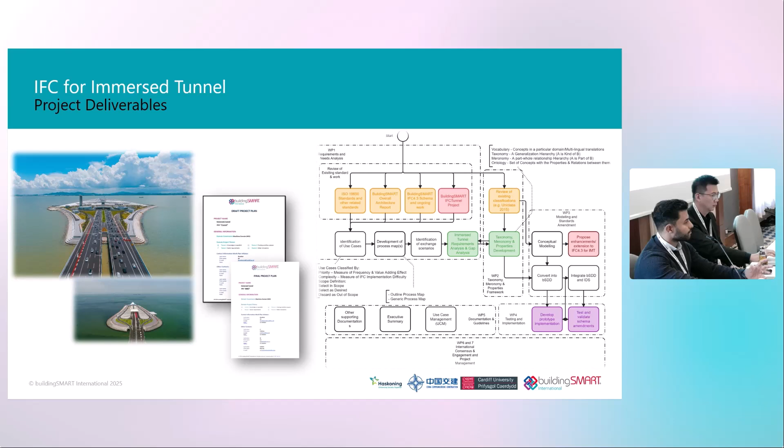And of course, we have the UCM, which is more a library. We can use it later on. So we use the IDM, even if it's an old concept or standard that is not fully shown within the IFC or within the openBIM workflow, but it's quite a proof that it is actually good to be used. So we divide this into 4 primary tasks. So now I'll talk first. We'll zoom into each of these items to actually look into more details.

But the overall is reviewing the existing standards within the buildingSMART ecosystem. Then we move to developing the use cases, the process map, whether it's high reference process map or more use case process maps, and then defining the information or exchange requirements or the exchange scenarios that can be captured through these process maps. All this helps us also to develop the gap analysis.

So we have different ways. So we have the IFC schema as the main base to do the analysis, which is IFC 4.3. But at the same time, we have the tunnel project, which is running, still in progress. So we are looking forward to see the final result when it's officially delivered, so we can actually do another small or light gap analysis against what has been developed.

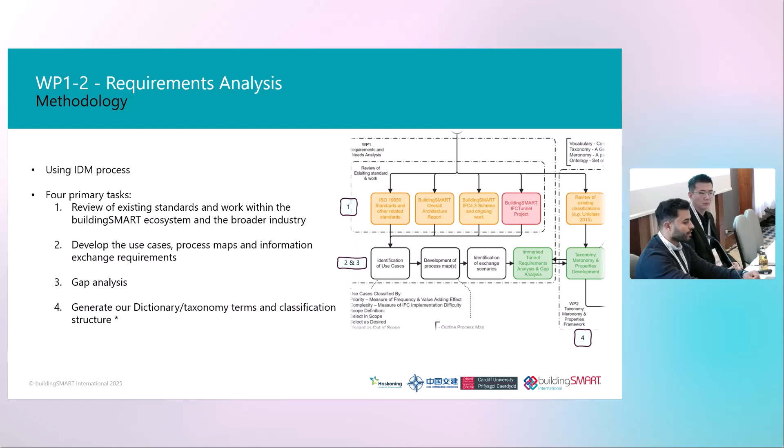And all that helps us to actually define our scope and the range where the immersed tunnel needs to be captured. And after that, we can define our taxonomies, classification structure based on all these concepts that have been defined within the use cases. So that's the first part when we reviewed the existing standards. So as I mentioned, we have the overall architecture report.

So we can look at the functional components, the spatial structure in the IFC schema, and different angles we can look at the IFC schema. But the first thing, you need to actually have a limit where you're looking at, you need to define the certain scope, so you can actually look within the IFC schema. Otherwise, you'll be looking into a schema that has been developed over the years, which is quite complicated and can be represented in different ways as well.

And also the tunnel projects, we looked at through the requirement analysis report, the summit records - they've been quite helpful, and also the sprints they've been doing with the software vendors. Sergi from the tunnel project mentioned they try to show how the IFC file can be structured, going from IFC project to IFC site to spatial structure, even to what they're proposing at IFC 4.4, like the IFC tunnel classes. So they covered a lot of wide area, focusing on the geotechnical part, the systems, and also the IFC alignment.

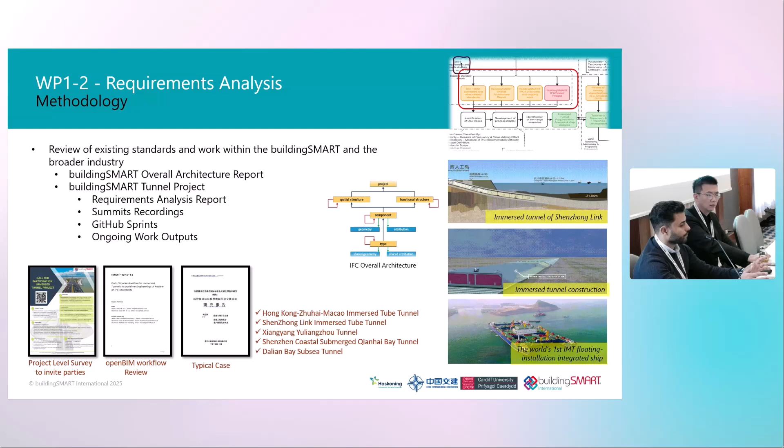Then we move to the use cases. So now we need to define the use cases. We looked at the tunnel project use cases to avoid overlap or repetition, and at the same time defined our use cases that come from our industry partners - what they need to see within the IFC schema. That was put into a desk review within our team to prioritize these things by priority and complexity. Complexity is how complex it is to define within the IFC schema, and priority is whether it's high value to the industry, or medium or low.

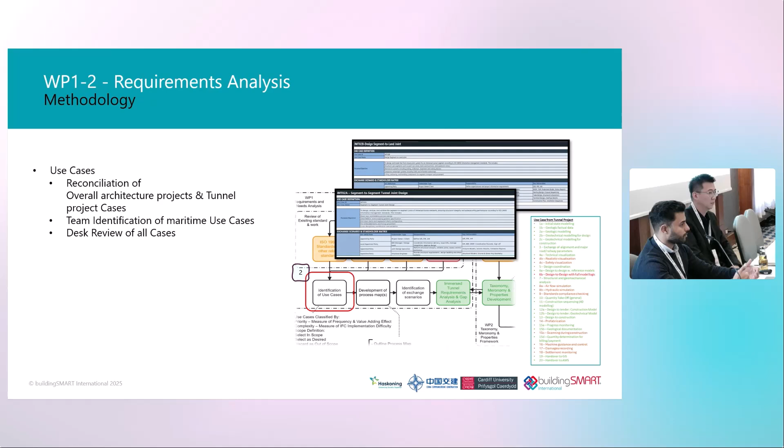Moving on, we had process maps collected from different partners. The challenge is to actually try to find a reference process map, trying to consolidate everything into something where we can understand the immersed tunnel, the exchange points, for example in the design of a tunnel, and where all the data is being exchanged. But we can't just keep it - we need some generic reference process map, because each country or organization may have a different way of doing certain things. So we need to find a more reference point to use.

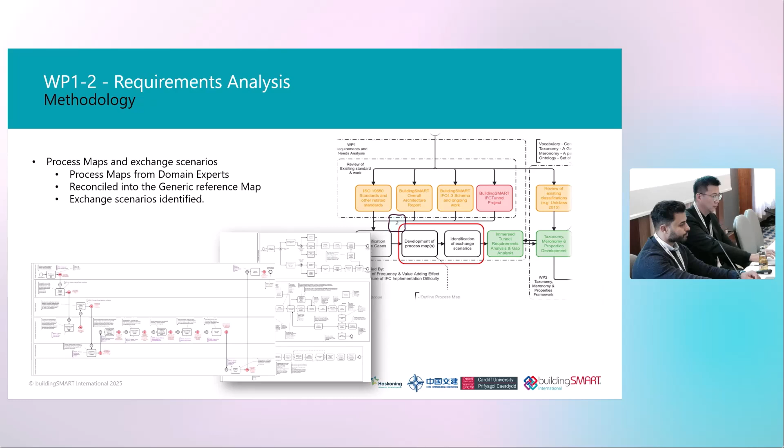Along that path, we also developed the taxonomy, trying to collect all the concepts and structure them. Currently we're collecting everything, documenting it in Excel sheets, and mapping it through the IFC schema, looking at the schema and trying to find what best fits certain concepts.

We're trying to go further than that by documenting this in a more automated way, where we can capture these concepts, taxonomy, meronomy or properties, while also bringing all the industry partners together during development to actually build that taxonomy or agree on a certain taxonomy.

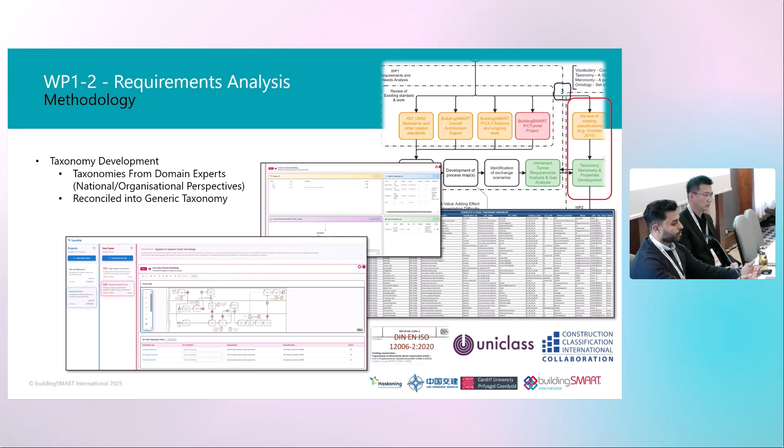So now moving to the use cases - within the tunnel projects we had around 31 use cases, divided into main use cases and subdivided into sub use cases. Within the immersed tunnel, we're trying not to overlap or repeat what they've been doing, because we still don't have the official documentation for the tunnel projects yet.

If we just focus on the IFC 4.3 schema without taking the tunnel project into reference, that can at some point overlap with them once the official IFC schema with the tunnel update is released. So to avoid this, we're focusing on specific use cases for the immersed tunnel project, but taking the tunnel project as a reference point so we can learn as well.

So we defined this into 9 sub use cases. Some use cases in scope, for example, the segment-to-land joint, which they call special segments - some segments connect between land and sea, versus typical segments connected within the sea. We're also looking at outfitting, because they have temporary outfittings and other types of structures that have been used, and we're trying to capture this too.

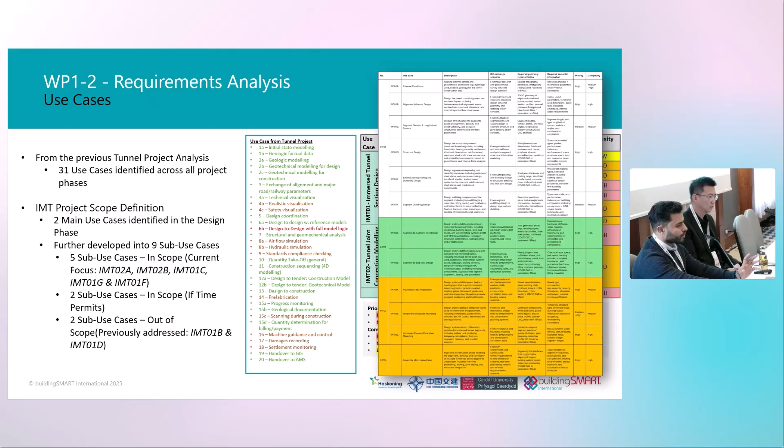There's more detailed documentation of the use cases. Moving to the process map, we now have a high level process map showing the design stage of the immersed tunnel. Within that, certain use cases have been evaluated in more detail, breaking down into more detailed process maps.

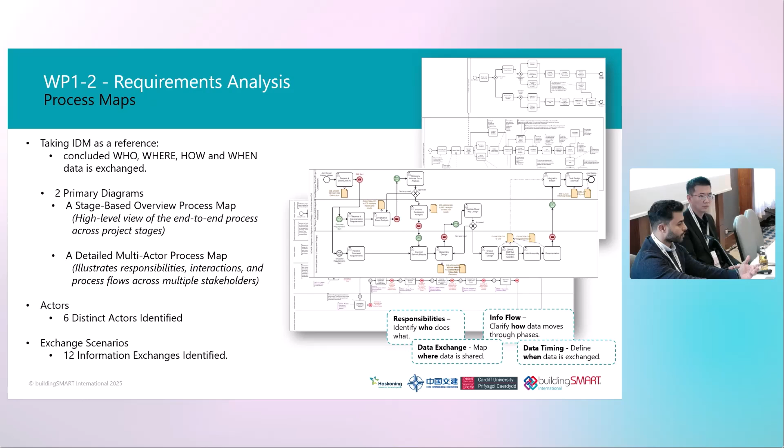Alongside this work, which is what's coming from our industry partners, we're trying to align it with ISO 19650 and the level of information need concept. There's a big connection here between these logics, so we need to figure out how IFC is complementing ISO 19650, or whether ISO 19650 is complementing the IFC schema. We need to see where the exchange points are, or the touch line where all this data can be exchanged.

When we say level of information, LOIN, or level of information need, that's what we talk about with IDS, which is part of the openBIM workflow. We're trying to capture these requirements through IDS files. This was mentioned in the keynote speech on the first day, where the IDS files, I think from the airport domain, define several IDS files, and all these IDS files actually represent the final project delivery.

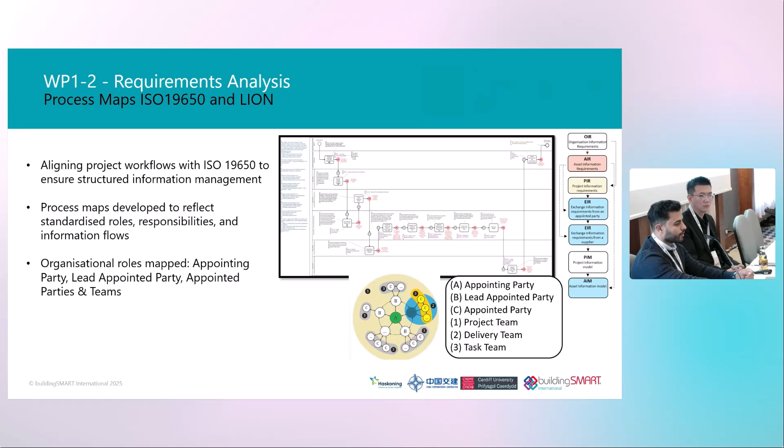So it has different levels of information in each of these IDS files. For the taxonomy development, once we collected these concepts, we still need an expert panel to actually standardize this so everyone agrees on the final version. But in order to do that, we need to use some kind of standardized way to capture this information.

So we use ISO 12006-2:2020, which provides the classification logic. It's not providing us with the classification itself, but it gives us the logic to break down these concepts into different categories, and also gives us the taxonomy, which is the type of relation, the meronomy part of relation, and also the properties, which takes us to another concept, the ontology, where we define the object, predicate, properties - these triples.

One thing about the 12006 standard - in the past it was more specific, but with the new release in 2020, because a lot of classification systems have been released, they're trying to make it a bit more generic. That's something I think has been included within Port Waterway part one, but with the new part, it was a good idea to do a refresh and go through the newly developed version to have a look.

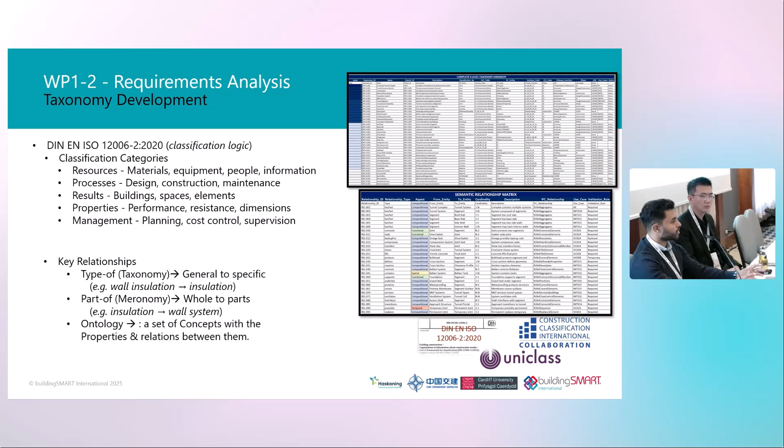This video shows the platform we're trying to develop to capture this taxonomy. It's ongoing, under development, so it's not something fully developed yet. Let me explain first.

So you have the project, the use case you define within that project, and then you can capture it using the BPMN process map to develop it. Within that exchange, you can also inject some of the ISO 19650 concepts. Within that, you can then go to the domain or model concepts, where you're talking about classes, object properties, or data properties - maybe some of you have already seen Protégé, for example, so it's something a bit closer to that.

But Protégé is based on RDF data structure, whereas here we are using more of a structured database, which is something we have another idea to add in the future.

Some of you might question why this is different. You complete a certain use case and make sure it's correct, then you can push it there, and the industry can actually learn from it for future projects.

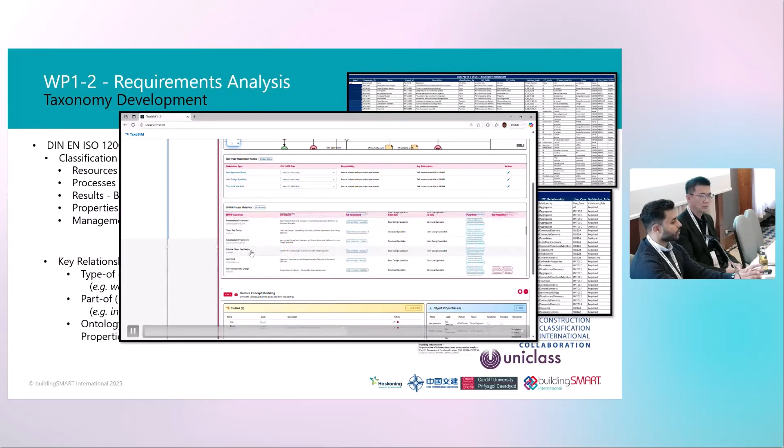On top of that, we're thinking to add AI into it. So that's another layer where we're trying to use natural language processing, or large language models, maybe a customized one, where we're focusing more on the IFC schema and the classifications. And that can help us give suggestions or recommendations when you define a concept.

So if you say, I want to define a joint, or maybe a Gina water stop, what is the closest thing in the classification to this? That gives you more recommendation, help you. It's more like having a third voice in the room to give you information while you're developing your taxonomy.

And that can also later be structured into IDS files, valid IDS files. But this is something still in progress.

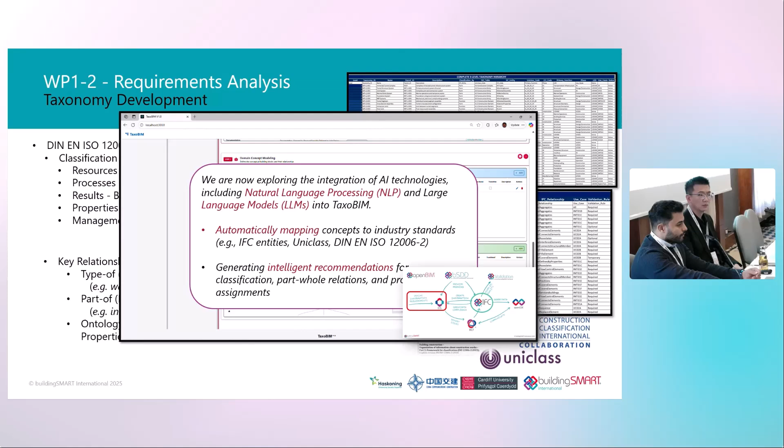For the gap analysis, as we mentioned at the beginning, we have different work packages, but these work packages are not working separately. They are actually either overlapped or linked somehow, so they contribute to the next one, and we are doing it as cycles. We go through the work package in a first cycle, then we do a second cycle to improve it.

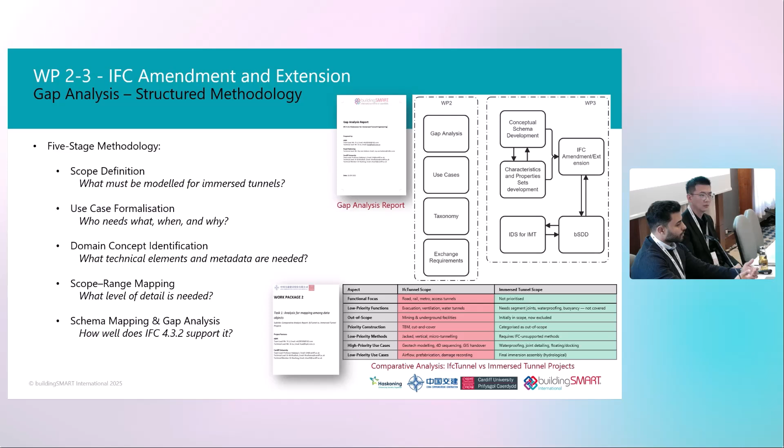So we divided the gap analysis into a 5 stages methodology, focusing on the scope, the use case formalization, the domain concepts, technical elements and metadata. That helps us define the scope and range, and also map it to the IFC schema.

Another aspect we looked into is how to identify entities in the IFC, how to break down a project. So we have the spatial structure and the functional structure, and that also helps us define 3 waves when we review the IFC schema.

So one focuses on the metadata infrastructure, which is the high level, maybe IFC project, IFC organization, and that kind of concepts. Then moving to the components, and also whether the geometry is enough, and also the spatial structure, how the tunnel is actually structured. Because for a building it's quite clear how the spatial structure can be, but for tunnels or other infrastructure projects, it might be a bit confusing on what is the right approach to follow.

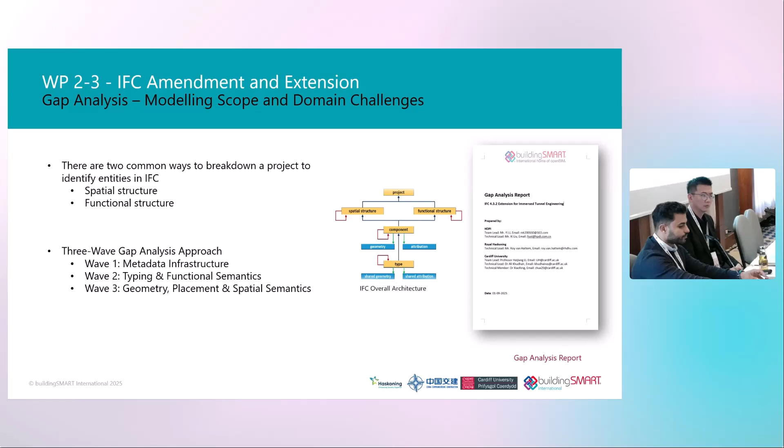If we look at the spatial structure, we have the project, we have the site, then we have the facility level, then we have the facility part level. That's the first assumption. Then we have the tunnel section. A section might be made up of 3 to 5 segments, and that will make a full section, and the segment is the modular section of the tunnel. Between these sections we have the joint mechanism, where we have like a Gina water stop, Omega water stop, and other types of components.

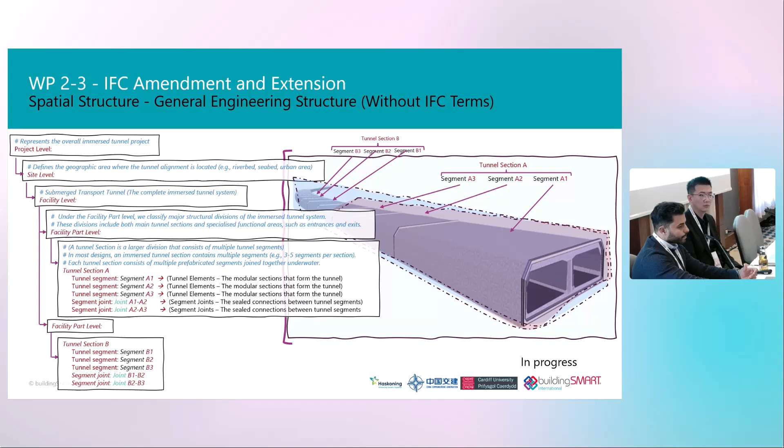Another thing we did is to run an example of exporting a segment from IFC from Revit using the IFC 4.3 exporter with the current version. So we downloaded Revit 2025 and tried to use the default Revit exporter. We looked on GitHub for the latest update that has been released, maybe to fix some bugs or something with the exporter.

So we exported using the closest match to marine facilities, or to Immersed Tunnel. We set it to IfcMarineFacility, and also tried setting the predefined type to user defined, so that's something we tried to do without any manual mapping within Revit.

So there's an option to actually go classify what type of entity they are close to. So trying to actually use exactly what the model has been received by or sent to us. And we saw a lot of IfcBuildingElementProxy defined within this model. So there's no semantic clarity yet. So we're missing that. So everyone needs to actually define predefined types to actually provide more clarity.

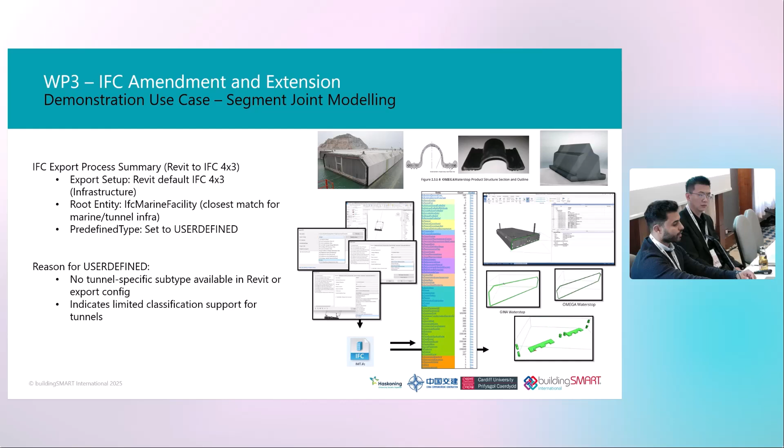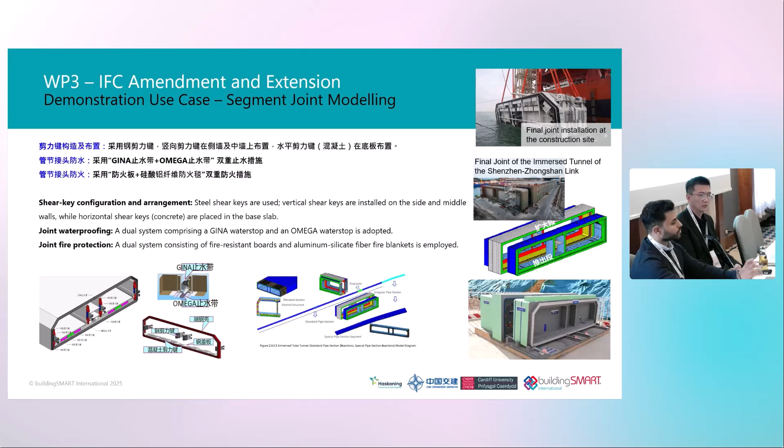And also this is one of the use cases we selected, which is the joint design, because we found this use case is a bit different than other use cases within the tunnel. The joint might be used in other infrastructure, but in this case it's a bit more specific for the immersed tunnel. And we define the concepts, the properties within that joint. And this is without the IFC.

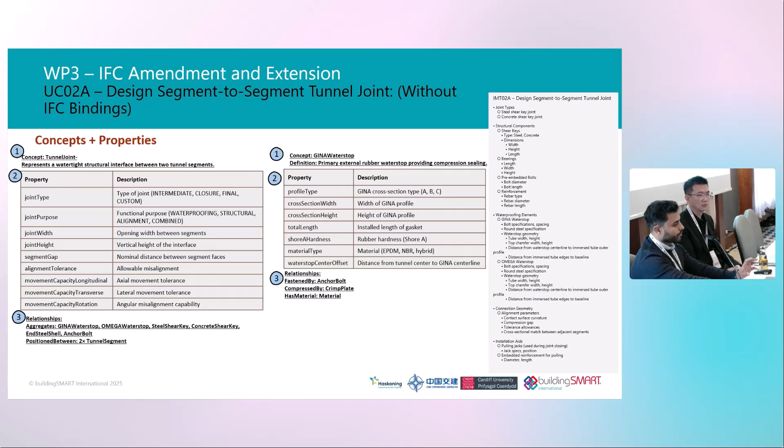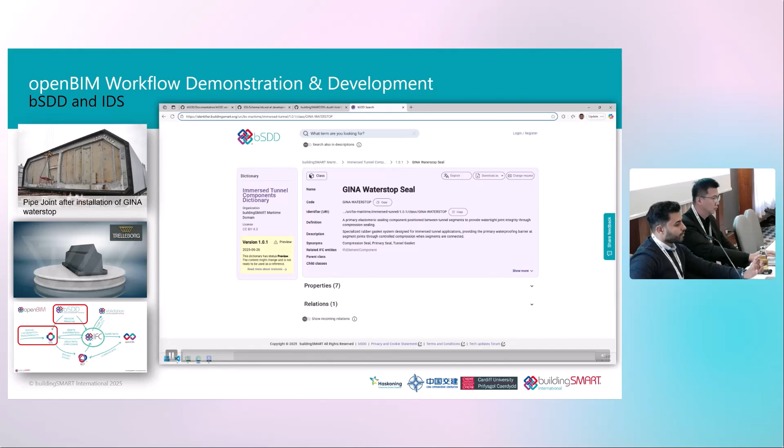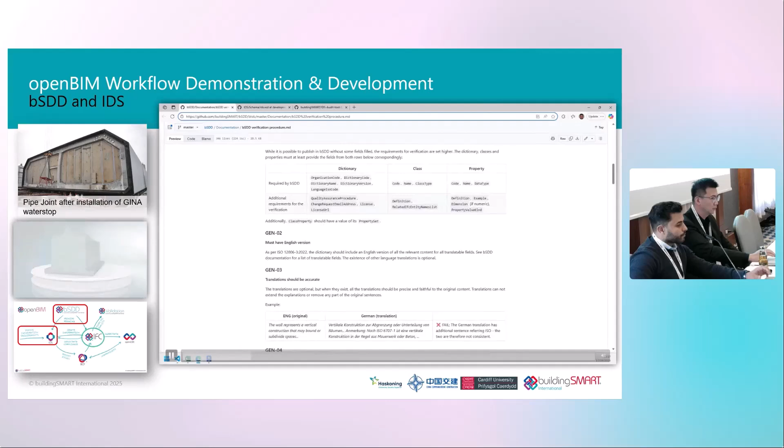Then after that, we're trying to show it through a demo through bSDD. This is more like a demo where we push to the bSDD as a test. So that's Revit, that's the segment, and this is the JSON structure of the bSDD. So we document all the concepts and their properties, and then we followed the guideline for developers from buildingSMART to make sure the JSON file we produce is a valid JSON file that can be pushed within the bSDD. So for example, you can have the IFC prefix within the bSDD.

Then after that, we developed a plugin using Python. It's still under test, so we're trying to add a classification while connecting to the bSDD dictionaries using the buildingSMART API. And then we can select the things we already published in the bSDD to add these properties. So once we add this, you can see here in the side panel, the URI has been added, or the classification, and also the mockup properties have been added here just to test.

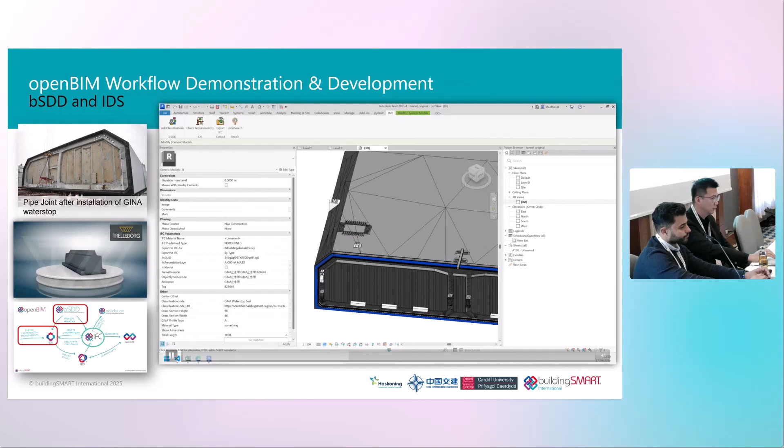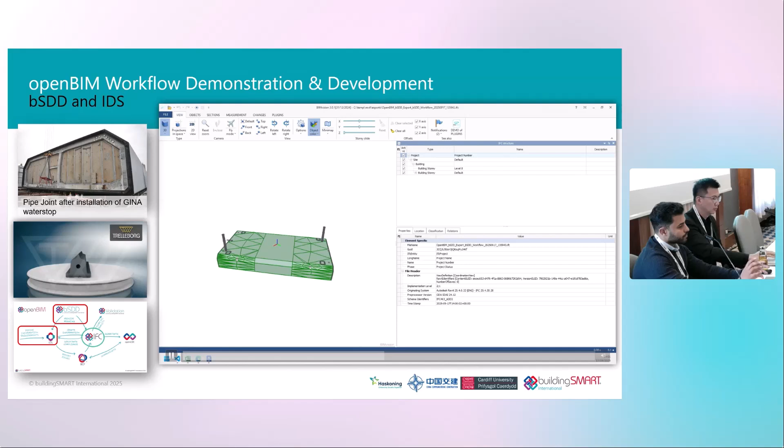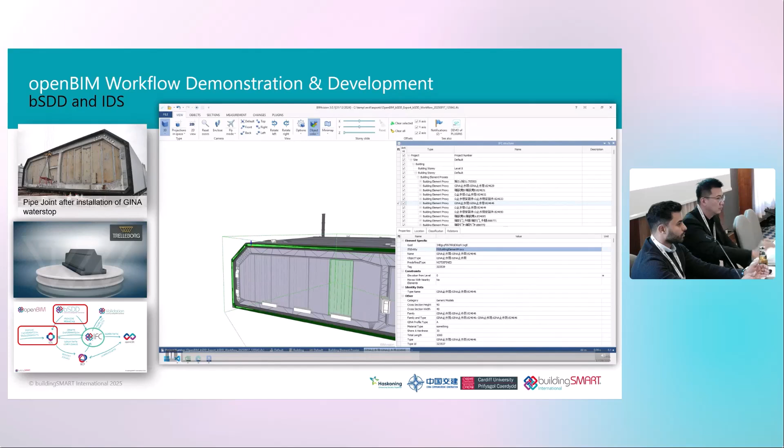And after that, we try to export the model in IFC. So here we're using the default exporter within Revit, but on top of that, we're building the IFC reference mechanism. So IfcClassification, IfcClassificationReference, and you see the properties, but it's still not clear. It's still under development, but the idea is that we don't have the property sets yet in the IFC schema. These are more like customized properties. Also with Revit, something has been added under the other categories where we can add more clarity by adding it into maybe IFC parameters in the future.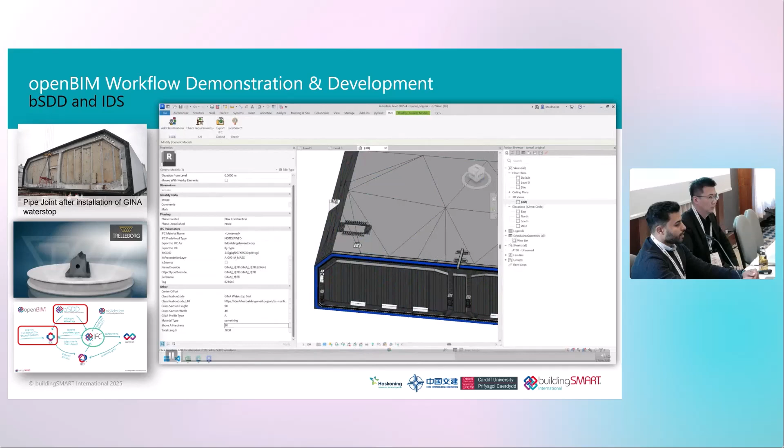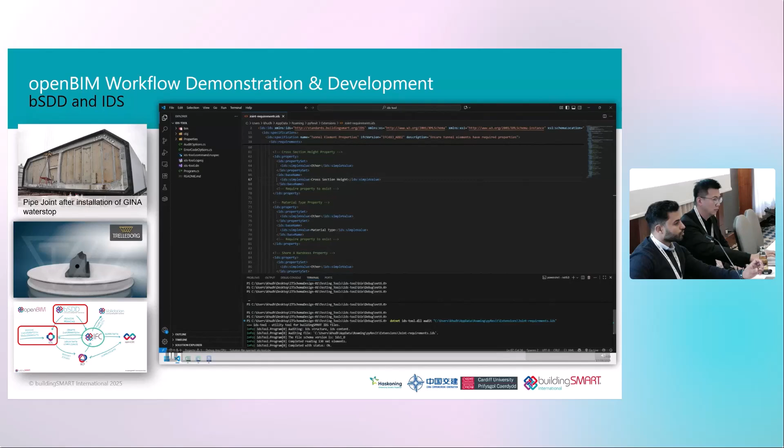The next part is to actually test the IDS. So with these requirements we added, we generated an IDS file, and that IDS file is documented using the IDS schema published in GitHub by buildingSMART. The structure you see is divided into specifications and requirements, and then we use the IDS audit tool. The IDS audit tool, also by the buildingSMART community, helps us check whether the IDS file we created is a valid IDS file.

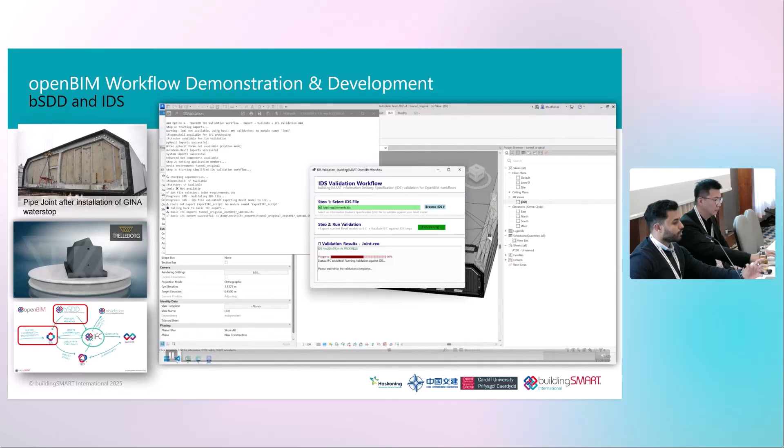So once we created that, we can do the check, and here we're using IfcOpenShell, or IfcTester, to check the requirements against the information of the properties we just added. So we see here two specifications have been added. One passed, which is the IfcBuildingElementProxy, because most of the model was classified under IfcBuildingElementProxy. And the properties have been added only to one element at the moment. Only one has the properties. And all this workflow is contributing to the IDS bSDD workflow.

There are other options. For example, we could have used the buildingSMART plugin, I think, to add bSDD classifications. But when we tried to use that one, it's working with Revit 2024. I think that's the last support for that. So we have two options: either downgrade to 2024 and try it, see how it works. Which we have done, but that's for one purpose.

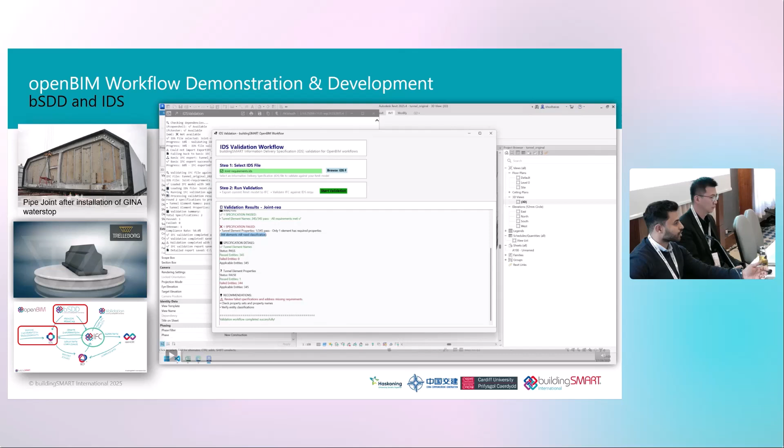And the other thing is to just continue our work with the latest Revit version, what we can add to that, and at the same time we can learn how the bSDD actually works. So how we connect to these APIs, how we're going to get the data, how the data is structured. So it's more like a practice for us to actually understand the entire logic rather than using something.

The other option is just to upgrade the APIs and that plugin from 2024 to 2025 and use it as well. So it's both sides. You need some development. So which side do you want to take? Everything works. At the end, we are serving one idea, which is we're trying to show the openBIM workflow, and it is open, so it should be reaching the wider community as well.

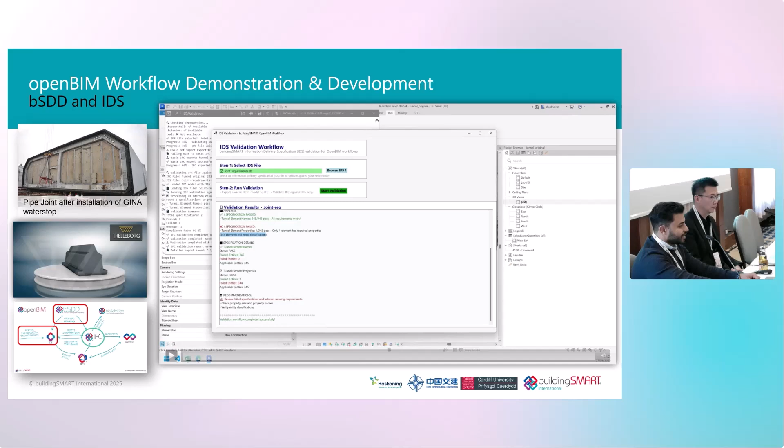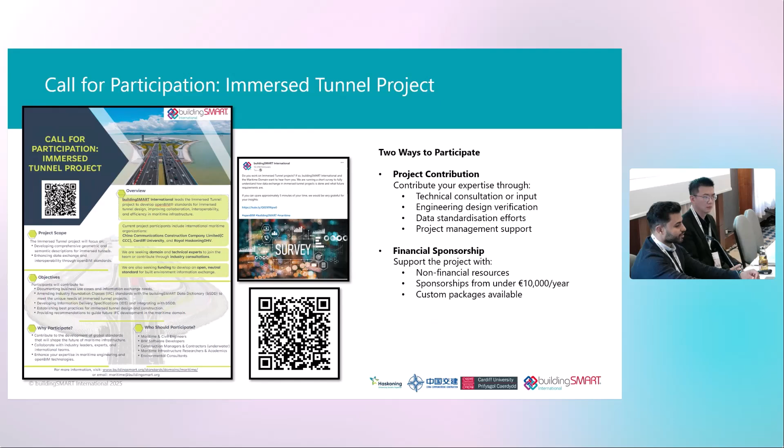And that's the call for participation for Immersed Tunnel. So we're always happy to have more people to join us. We have different types of contributions if you want to join: in-kind contributions, contributing use cases, or any type you find yourself or your company can be part of this project. Yeah, I think that's pretty much all from my side today, and maybe open for discussion if any questions.

Hi, Tina from the airport domain. Hello. I think we got the same problem with the classifications and defining the properties. So the question is, the platform you develop, could it be open for the other domains as well? So we can join together, because I think we have an overlap between airports and tunnel and maritime. So maybe we should work together a little bit more to define these classifications. Would be great.

Yes, definitely. I'm a big fan of the airport domain. They've been working on the openBIM workflow, like Christopher, I think, he's done a lot of work when it comes to all these demos trying to prove how we can actually reach the ultimate output out of the IFC schema. So it's quite good to see you here today.

And yes, this platform is under development, so it's not actually stable to be used yet. But once it's used, it will be open, because that's what everyone is trying to actually collaborate within. So this project is under the Maritime Domain. But of course, we mentioned yesterday in the Maritime Domain session, cross collaboration with other domains is missing, because everyone is developing things in a certain way, and it works, and we need to learn from each other. So we need to give and take.

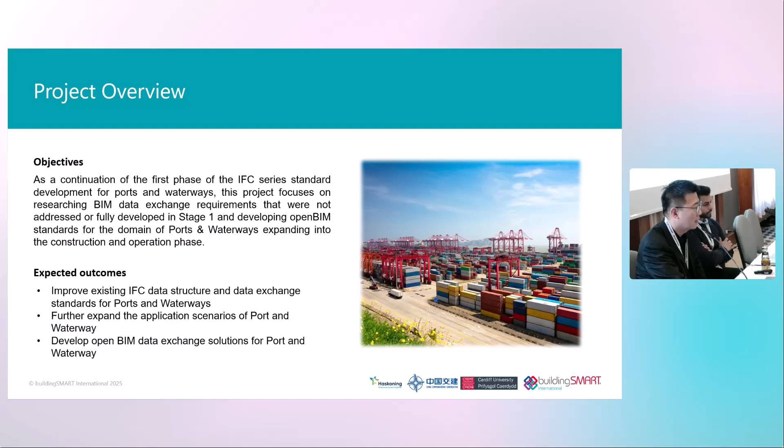And the last part is that we will define some new use cases, not only in the construction and operation stage, but also some newly emerged use cases like AI or more advanced use cases.

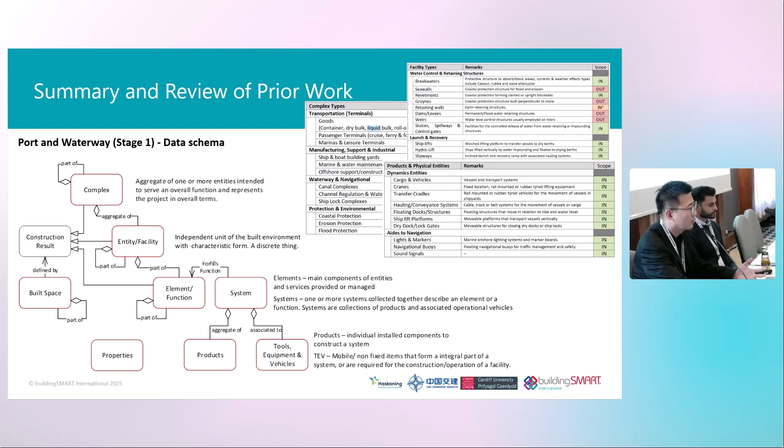The second contribution is the use cases. We grab some information from overall architecture and also from IFC Bridge projects. So we define 29 use cases in the first stage. And we classify these use cases based on the priority and the complexity. Based on these two indicators, we select the most urgent use cases that need to be resolved at that time. So in stage 1, we finally investigate 20 use cases, which are green and orange. And we left 9 use cases for stage 2.

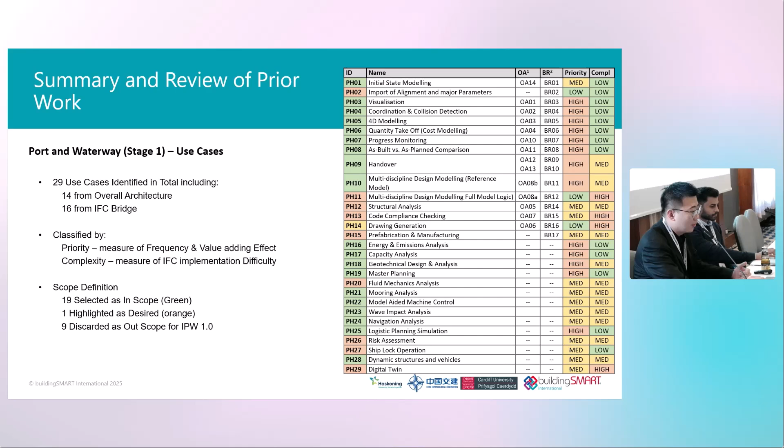So this is the brief summary of all the concepts, types and entities we define in Port and Waterway in stage 1, and all these concepts had been published in IFC 4.3 last year. From this summary, we can see that approximately only 62 main concepts were defined in stage 1. So it's still a long way to practical use for industry partners.

So based on this, we have several rounds of discussion with our industry partners, and we summarize the following 3 main gaps in Port and Waterway. The first one is the incompleteness of the existing IFC schema. The second one is there are still some outstanding use cases in stage 1. We need to finish that. And the third one is there are some new application scenarios emerging in this domain.

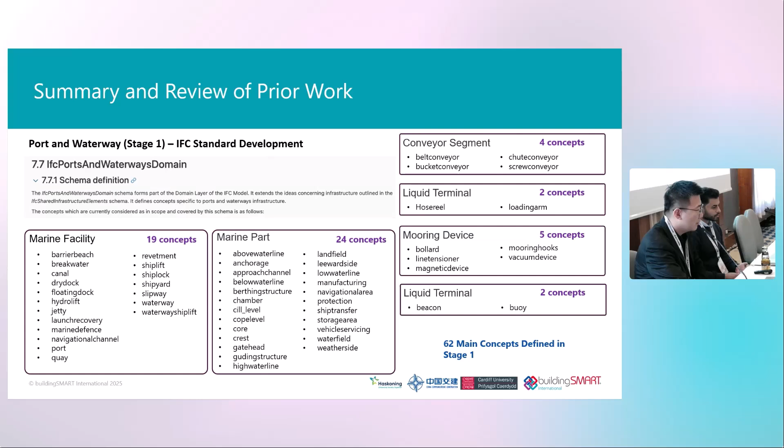So first point, incompleteness. Here's the summary we have for this incompleteness. All the concepts listed in these tables are not fully covered in the existing IFC schema. If we go back to the slides here, we can see for marine facilities, we already got 19 concepts. For the facility types, some of the concepts are covered, like breakwaters, like dry dock. They are already defined in stage 1. But some other concepts like sea walls are not defined in stage 1. So for stage 2, we need to work on these missing elements.

And also for complex types, none of these concepts was officially published in stage 1. That's another part of our main work for stage 2. Besides the concepts, we also have some outstanding use cases. As I mentioned before, there are 9 use cases we defined, but we didn't investigate in stage 1. So here is the list.

And there are some quite interesting use cases, such as structural analysis. At that time, this part was quite difficult and quite complicated. And 2 or 3 years after that, there's a new domain called the structural analysis domain. They published this part of work. So that means it's quite important. And for now, we need to go back to see what has been published, and we need to do some mapping between our demand and the existing IFC schema for structural analysis to see whether we can supplement any new content to this part.

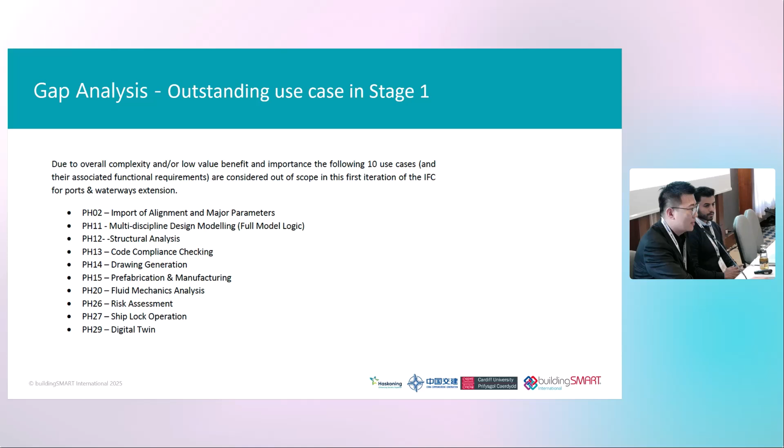So for new application scenarios, we had discussions with our industry partners and got some insight from their side, and we summarize 5 big topics. The first one is protection and environmental. It includes coastal protection, erosion protection, and flood protection. These are all topics we haven't touched in stage 1.

And in stage 2, we no longer just focus on a single channel or waterway. We want to dig more information from the correlation between different channels. So we set up this maritime network and system topic, which is about waterway networks, canal networks, and flood protection networks.

The other quite big part is about the power. So with the push of the government, there are so many green power projects that many industry partners are working on. So maritime power generation is another big topic. We will focus on offshore wind generation and wave generation. So this is a totally new area for stage 2.

And as I have said before, for stage 2, the main contribution will also focus on the operation stage. So asset management and operation and maintenance will be another big part. We will focus on inspections, including underwater, maintenance of as-built asset models, and also operational planning and logistics. Besides this, there are some basic elements we need to supplement, like the geology and the environmental part, erosion and transportation, flooding and water management, something like that.

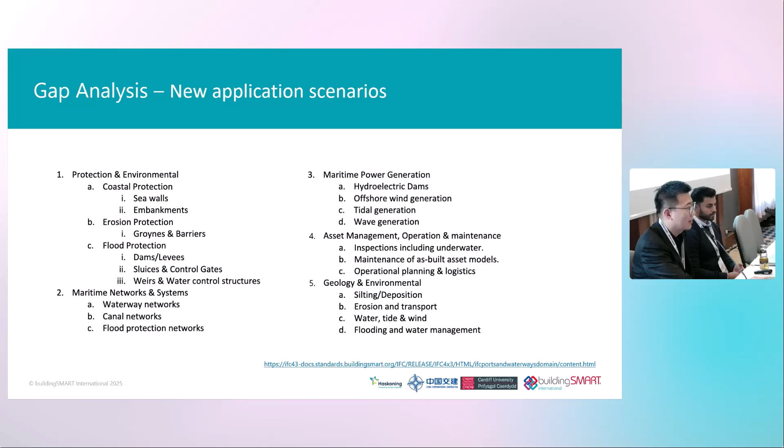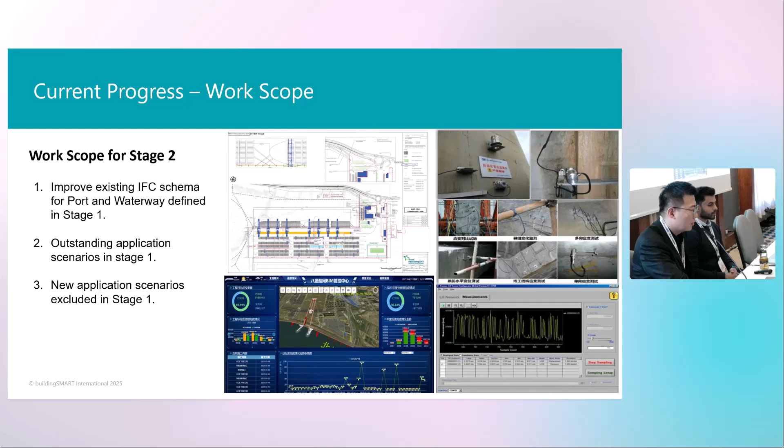So just a summary of the work or the contribution we want to achieve in stage 2. The first one is we want to improve the existing schema for port and waterway, and also we will finish some of the outstanding application scenarios we defined in stage 1, and we will add more new application scenarios for stage 2.

So here's the work plan for the second stage of port and waterway. The international consensus and engagement, and also the project management, will happen throughout the life cycle of the project. And for the technical development part, we will start with requirement analysis. We define new scope requirements. And after that, based on these requirements, we define taxonomies and also corresponding properties. After we got all this system ready, we will move on to conceptual modeling and schema development. This will help us to develop some technical components like IDS and the bSDD.

After all this work has been done, we will move on to documentation and do some modeling guidelines to help industry people, to tell them how to use this developed IFC schema. And the last stage is about the testing and the deployment.

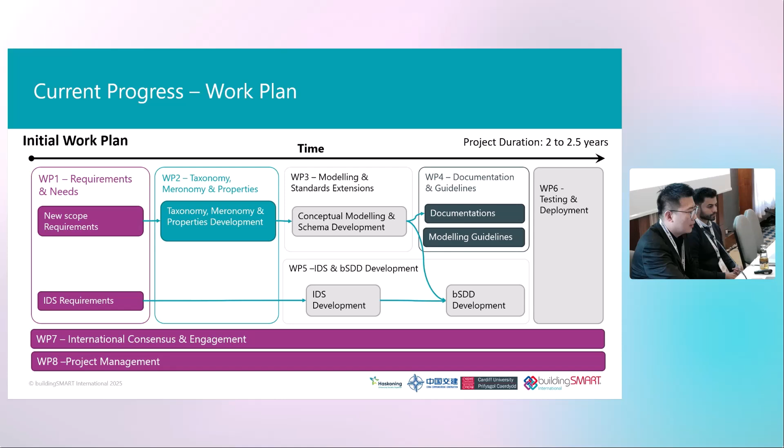So here are our preliminary thoughts for refining the existing schema. As we had some discussion with our industry partners, they mentioned that they feel it quite difficult to use the existing IFC schema during their practical work. They have their own classification system, but they can't find some of their entities in the existing IFC schema. So they feel it's quite difficult to map between their classification and IFC.

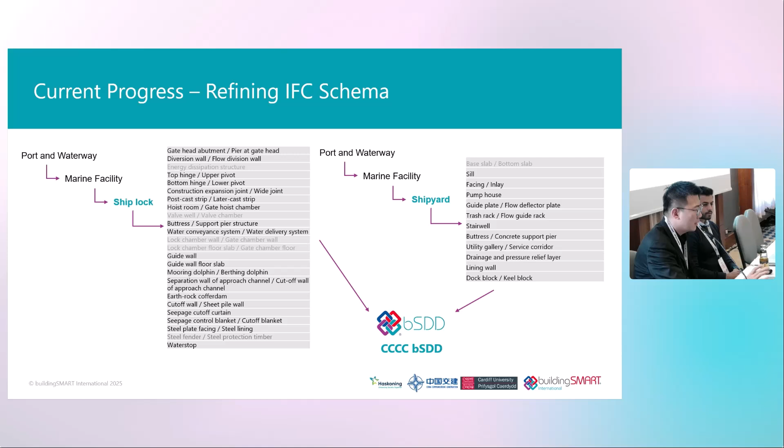And I know for some of the concepts there are some alternatives in the IFC schema, and they also have their own classifications. So all this can go to bSDD. If we make all this happen, I think it's quite helpful for us to have more practical partners work with us.

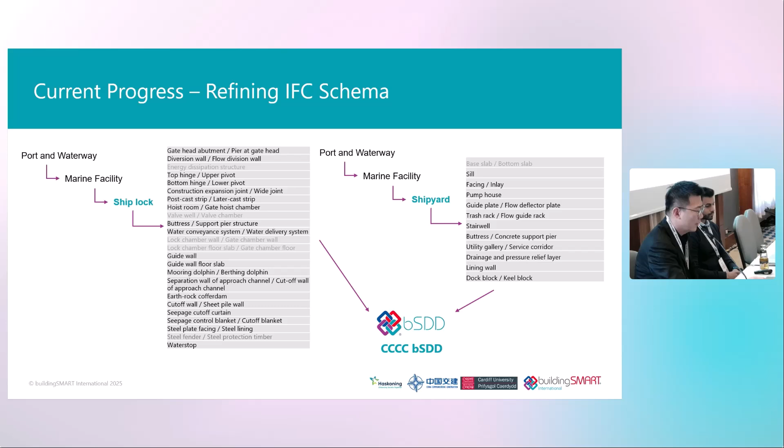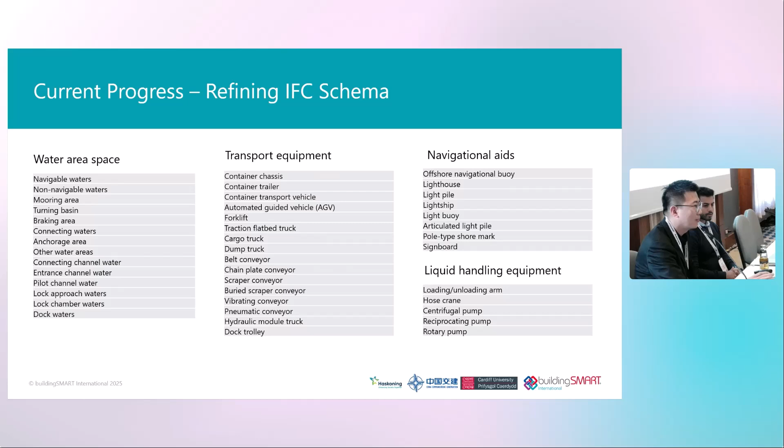They also provide some other concepts in water area space, transportation equipment, navigational aids, liquid handling equipment. So after this summit, that's the next stage of the work. We will go through all these concepts to find whether we can add more potential concepts into the existing IFC schema.

For the use cases, we investigate two use cases. The first one is water quality monitoring. In Port Waterway engineering, water quality monitoring is quite important because it is essential for ensuring safe navigation, protecting marine ecosystems, and maintaining the long-term sustainability of coastal infrastructure.

In China, water quality monitoring is becoming more and more important. It's gradually becoming a mandatory requirement for governments, saying if you want to have any projects in the water area, you must do this water quality monitoring.

So here's the process map. Normally, for this type of water quality monitoring project, there should be five stages. The first one is preliminary preparation. You need to do site survey, have an installation plan, and also do some procurement.

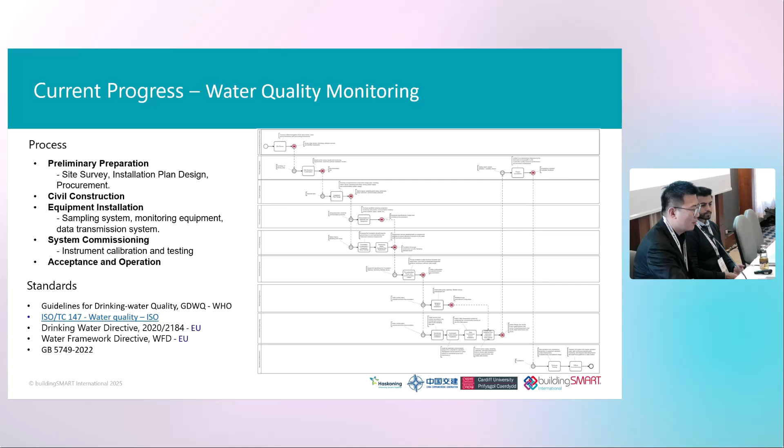Until now, there are many official standards for water quality monitoring released all over the world, from WHO, from ISO standards for water quality monitoring, and some regional water quality standards like EU standards and Chinese standards. We went through all these standards and summarized content from them.

For the information exchange process within water quality monitoring, there are mainly two big parts. The first one is the sampling plan. During this stage, you need to grab information from site survey, and select the sampling cross sections, sampling points, and decide the sampling depth and frequency. That's one big part for information exchange.

The other part is the monitoring parameters. Normally there are two types of parameters. One is water quality parameters, including physical, chemical, microbiological, and radiological parameters. And hydrological parameters, like water depth, flow velocity, and flow direction. So mainly these two types of parameters need to be monitored.

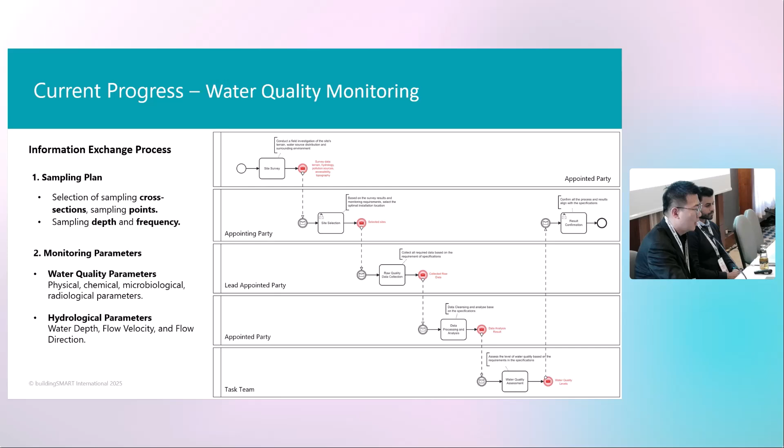Here's a table summarizing all the categories, indicators, and typical limits for each indicator as defined in different standards.

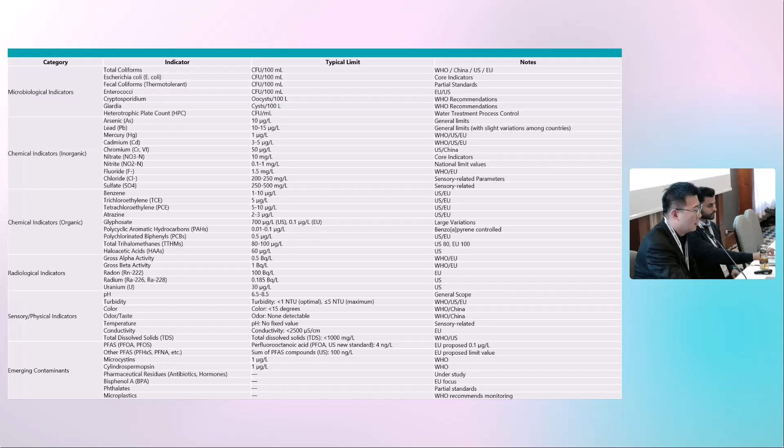Based on this information, we summarize a potential schema for water quality monitoring. Within the existing IFC schema, we have Port Waterway, and under that we have Marine Part. Within Marine Part, we have Water Field. That's all for the existing schema.

Then we want to add another concept called water quality indicators, with six sub-concepts for this category. That's all the categories for this monitoring. Within each category, there will be different indicators, and all these indicators will go to the property set.

That's the first use case. We haven't finished yet, but we will gradually refine it after this summit.

The second one we started is coastal protection. Coastal protection also plays a critical role in safeguarding shorelines and infrastructure from wave action, erosion, and storm surges.

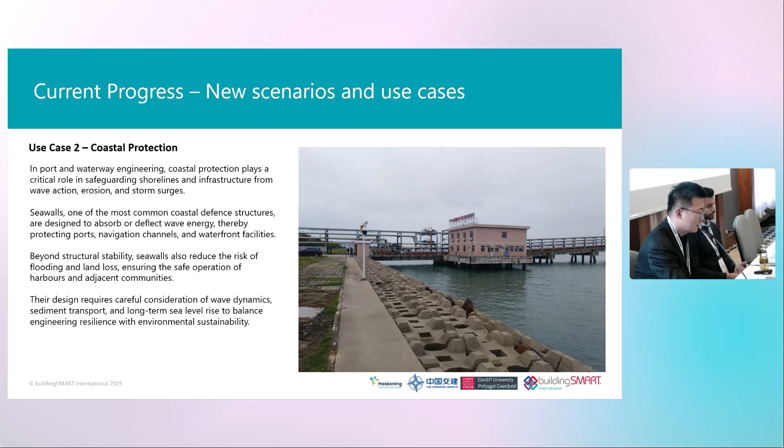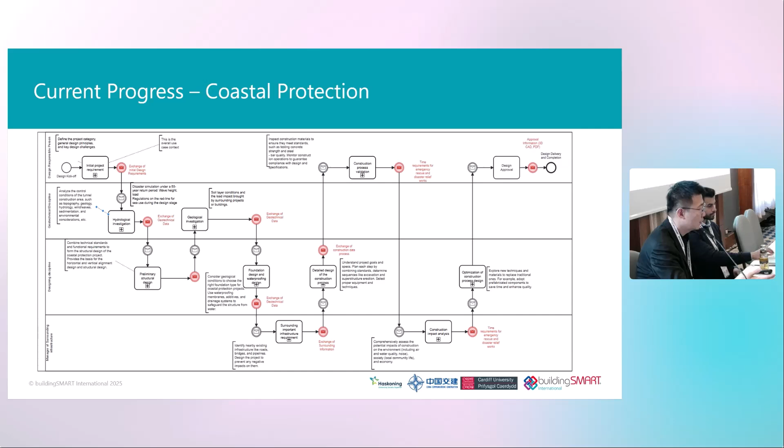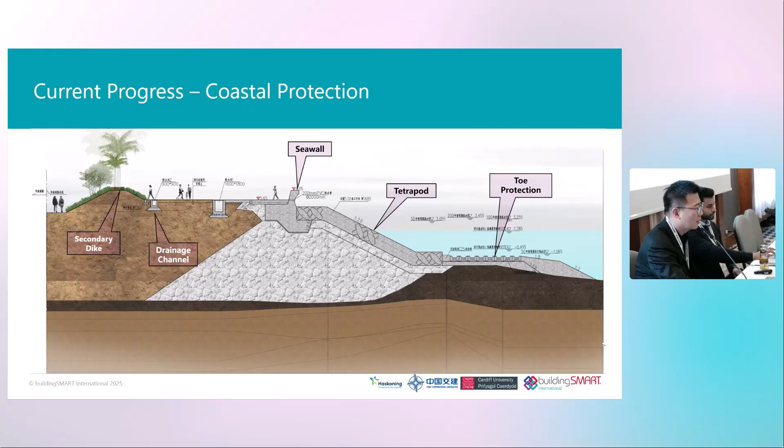For coastal protection, we haven't touched anything in stage one yet, so we summarize all the concepts based on their functions. As I mentioned, there are several ways to build this taxonomy: one is from the spatial side, the other from the function side.

Based on function, we summarize several big concepts, and then add all the facilities within different categories. For example, for wave protection and energy dissipation structures, sea walls and breakwaters all belong to this category. So we set seawall as a subconcept of wave protection and energy dissipation structure.

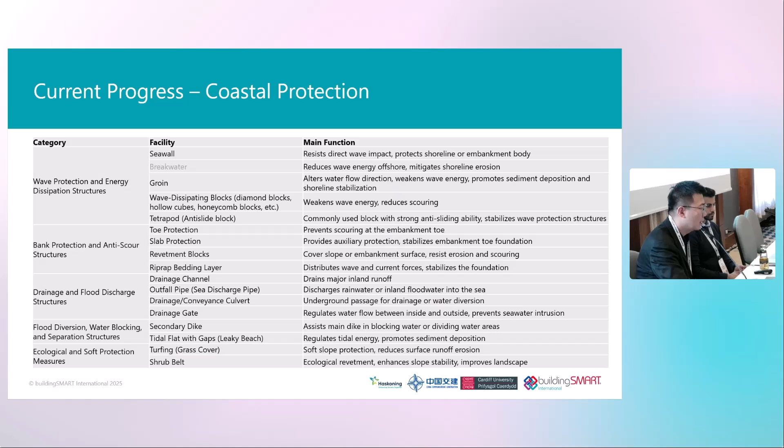So same to the previous use case, we also made some initial design for the schema. Under Port Waterway, we got marine facilities, but after that, we have no other concept with regard to this coastal protection.

So we add a new concept called coastal protection, and within this coastal protection we need to have some sub concepts. We just put all the functions in this part, and within each function we define several concepts, which is the actual concept, always an entity or facility.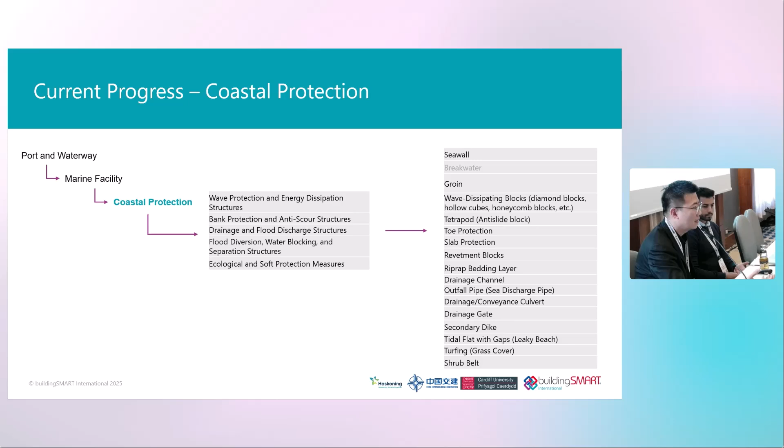That's the two use cases we are now working on, and there are also some new emerged use cases we will focus on in the next stage. The first big part is about construction site management.

Inside this kind of process, they have so much information exchanged. So in the next stage, we will try to merge this AI-driven approach into our new scenarios. We will investigate what type of information needs to be exchanged between different components, how this information is exchanged, and the whole process of this information exchange. We will try to embed our IFC concept into these new emerged use cases.

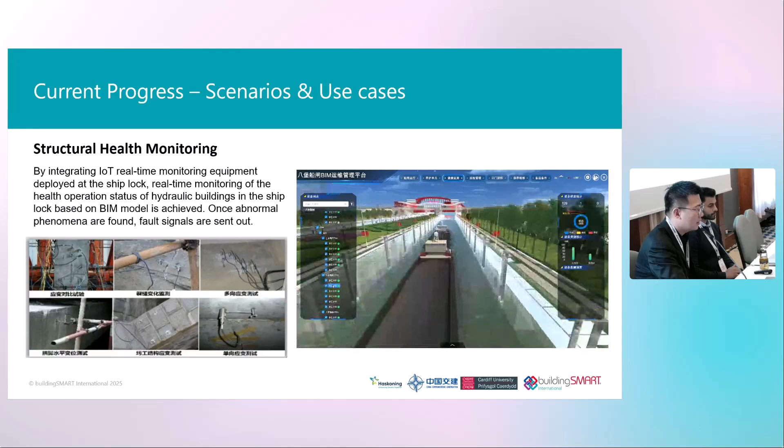So another quite important use case is structural health monitoring. On the right hand side, this is the actual project. After they finish construction, they do maintenance work, attaching some sensors on the structural components of the harbor.

It's a harbor, it's a ship lock. So they can detect and grab real-time data from the sensors. They can detect the strains, and also the cracks on the structural components. Then, based on this raw data, they will make some decisions.

So this is another quite useful part for these new use cases, because in the future, with more and more AI and new technologies engaged in smart infrastructure management, we need to model the specific work data exchange scenarios for different applications.

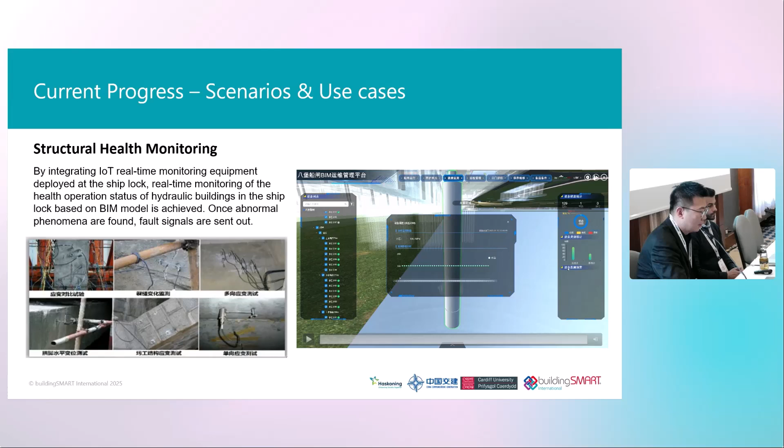Yeah, so that's pretty much all the current progress. For the next stage, we are still in the initial stage for this Port Waterway II, we just launched it in the Singapore Summit. So the next point is to finalize the project plan, and we need to determine the work scope.

And also the work packages and the tasks within each work package, and the project timeline and duration need to be finalized. And also maybe some of the expected outcomes for the project need to be slightly modified as well.

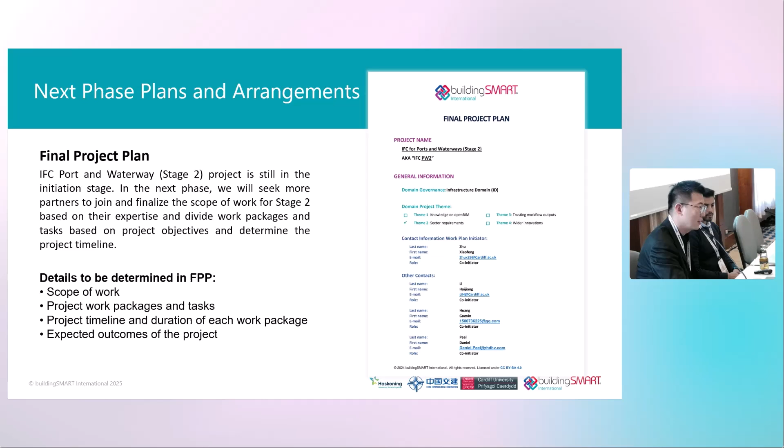Besides the project plan, requirement analysis is the next step as well. Based on the previous use cases we defined in stage 1, we will define use cases we want to investigate in stage 2. And also we will create all the work processes for each use case.

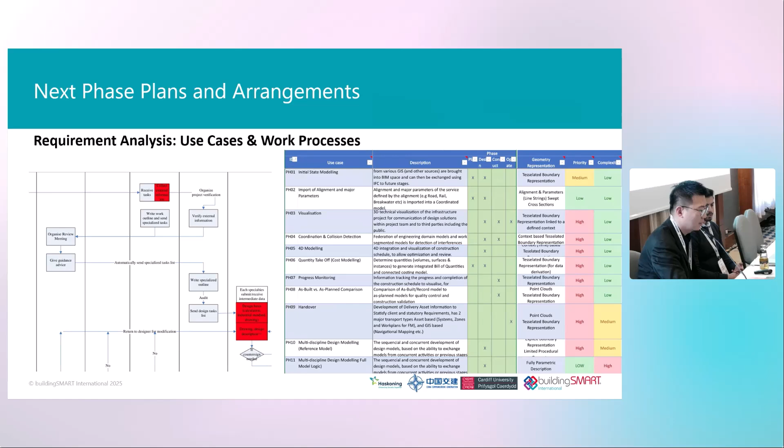Based on this use case and work process, we will develop corresponding concepts, taxonomies, that sort of thing. So at last, same as the Immersed Tunnel Project, we are calling for participation. We have initially defined some work scope, like I've shown before, such as management network and water network things. We are still looking for industry partners and academic partners to give us some valuable insights on this type of thing.

Yeah, I think that's all of my presentation, and it's open for questions.

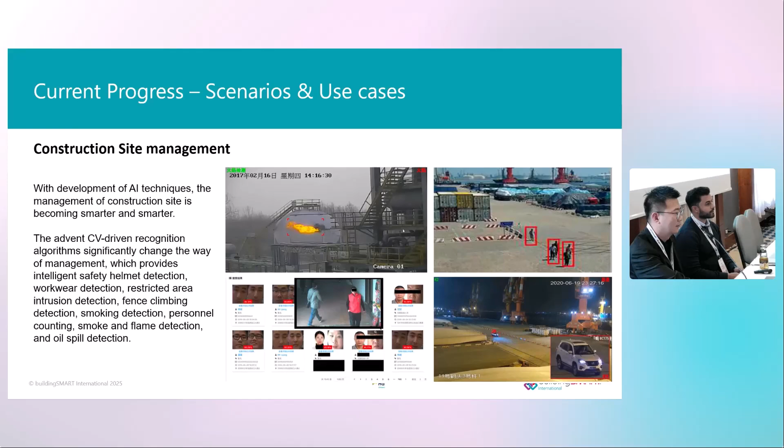Thank you for sharing your work. It's very interesting to see the use cases. I can see in your use cases there are some similar things with the tunnel project. For example, in the first use case, the water quality monitoring.

In the tunnel project, we proposed how to represent the property sets with the chemical substance and stuff like that, how much content it has, and so on. Also, for the second use case, we also have entities or property sets to represent the test results from sensors. I didn't really clearly see your sensors, but probably the inclinometer or strain gauge and stuff like that.

So maybe you might want to look into the entities and property sets that the Tunnel Project proposed. You might be developing something quite different, then in the end we are a bit confused which one we should be using.

Yeah, thank you. I think that's quite valuable feedback. So for now, it's just a preliminary idea for us on how we're going to organize our findings and embed them within the existing IFC schema.